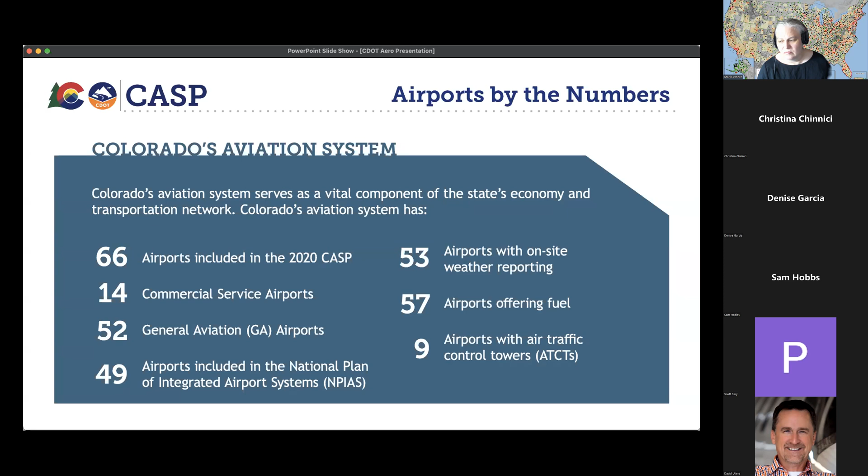And it's because of an airplane. So I think this is where our board is excited to try to leverage our existing system to find a way that these new alternatively powered aircraft that are more economically feasible, more environmentally feasible, that are scaled size-wise more to some of the market communities that we have, and how we can use this existing network of infrastructure in these airports without building expensive new runways and taxiways.

How can we leverage those to improve the way Coloradans move in our state? So this is where it leads into some of the things I know Scott was going to talk about, powering the future of aviation. And there's a lot of cool things on the horizon.

One that's being developed right here in Colorado is the new two-seat Bye Aerospace E-Flyer. It's a two-seat single-engine general aviation training aircraft that I think is really going to fundamentally change the cost and the ease of flight training. And it's no secret, if you've been following the news, there's a big pilot shortage. It takes a lot of hours and experience to become a pilot. It takes a lot of expense.

We're excited because here in Colorado, we have a lot of big flight schools, including the U.S. Air Force undergraduate pilot training program here in Colorado. How we can leverage these new electric airplanes to make flight training more cost-effective, quieter for the airports and their communities, and more cost-effective for the folks learning how to fly.

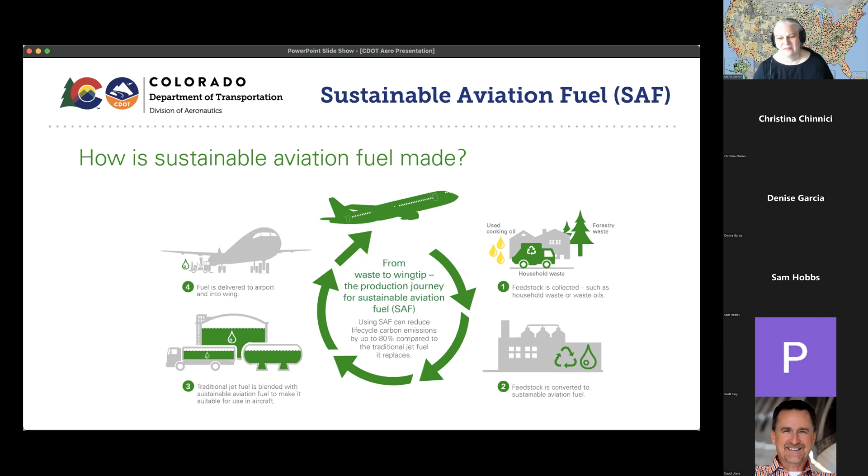I really appreciate it, and I will turn it back to you. Thanks, we really appreciate hearing about this. Let's see, one more question, and actually let's open it up to questions now since you have to leave early while we're getting Scott's presentation back. Can you say a little bit more about how you're working with airports already, David?

So we've really had some preliminary discussions, Marie, with I think some of the more forward-thinking airports in the state about potentially engaging in our study. But I think the first part of the study that we're going to undertake with NREL is going to be sort of an analysis of where people are traveling within Colorado, where are they coming from, where are they going to, what modes are they using, and then based on that data, we'll identify some regions and some key airports in those regions that we start discussions with.

I've talked with David Fleckenstein. Look, every single one of our state DOT directors, we would love to electrify every one of our public use airports and have them ready to go. But unfortunately, that just is not fiscally or technically feasible. So we've got to sort of narrow it down and prioritize those from a state level. And that's what our study with NREL will help us do, is to sort of focus on the key airports we need to start having those discussions with.

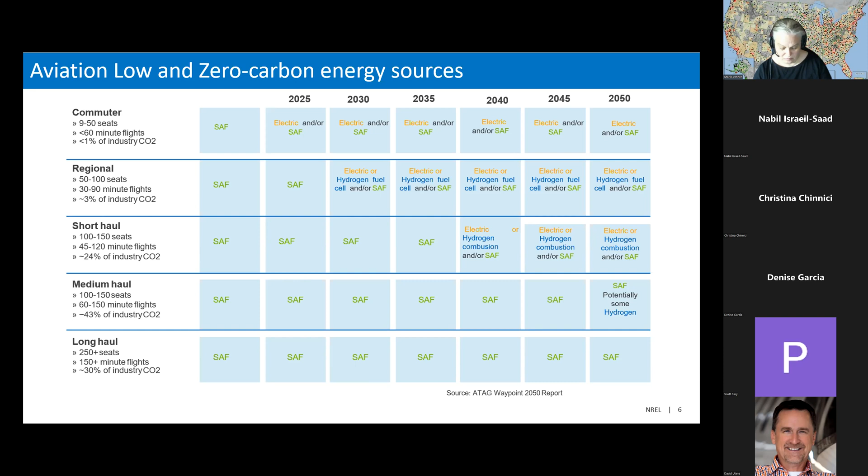But when you get to medium and long haul, liquid fuel, whether that is a biofuel, petroleum, or a new generation, they're called power-to-liquids, which is you take hydrogen and some type of source of carbon and make a liquid fuel that looks like kerosene effectively. That will be around for a fairly long time, it appears, in medium to long haul. So there's not one solution, is what I think the key takeaway here is.

Big thing we look at is each of these different next generation energy sources, whether it's sustainable aviation fuel, SAF, e-fuels, which are called the power to liquid fuels, or hydrogen or electricity. They each have a supply chain that has to get from where it's sourced to that aircraft to be used for transportation. And each are unique. Each have challenges and each have benefits.

And as you move through that process, we'll get to electric here in just a minute, but each of them are going to have their own discussions. Example, if you want to do SAF right now, SAF has to be trucked into many of the markets and then blended. Hydrogen right now is trucked because the pipelines only exist in a few regions, as an example. Electricity, the discussion is, okay, can we ramp the power requirements, the locations people want it at the peaks that they would like.

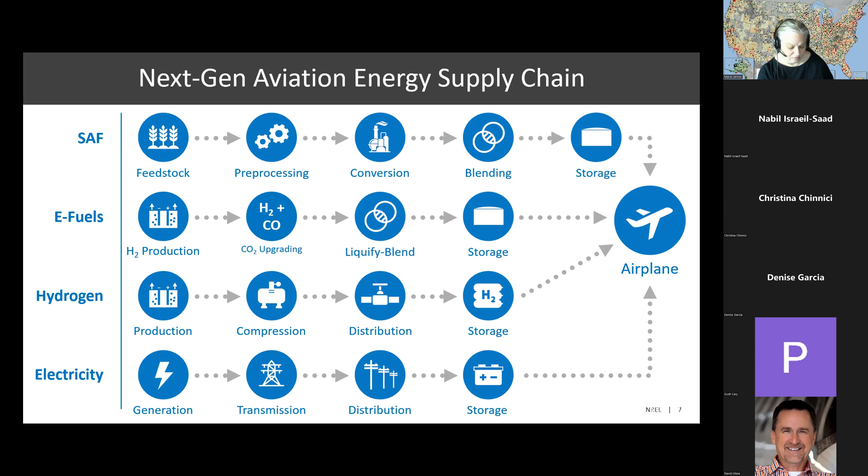Sustainable aviation fuel is the current viable solution to help reduce carbon emissions. So the DOT, DOE, USDA, FAA have all gotten together and are moving forward on what's called the SAF Grand Challenge, trying to have 35 billion gallons of sustainable aviation fuel available by 2050. The technologies already exist. There's already 7 pathways that are approved by ASTM. There's actually 9 if you count another certification process. And they are moving forward. Some of the challenges are just scaling and cost. And so those are weighing in on some of these discussions with SAF.

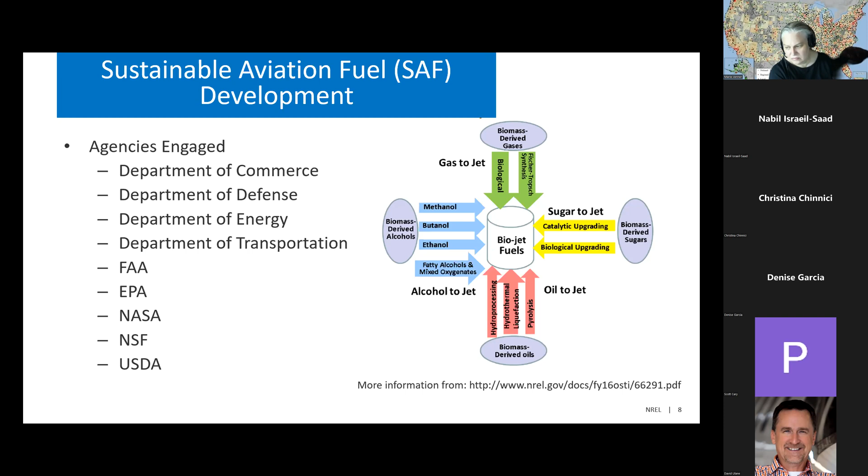Now let's talk about hydrogen. Hydrogen right now, there's also a strong movement here is that hydrogen sourced from clean sources, effectively wind and solar, and potentially depending on if you get into the color scales, you can call it nuclear, does not have air emissions, can be used, can provide long-term storage. And the other component here is that for sustainable aviation fuel, hydrogen is a key component that can actually make those products more viable more quickly. So you take a feedstock and then you actually add hydrogen to make it look like kerosene.

Within the hydrogen space, there's the Hydrogen Hub program, a little over $8 billion being put out to match and work with industry to start building infrastructure in regional nodes around the nation. This is moving forward right now to build these nodes.

The Department of Energy has started to scale this program to see if it's viable on an industry basis using forklifts. I heard an anecdote in the last couple weeks that roughly one-third of the food in the United States is moved by a hydrogen forklift, as an example, in warehouses.

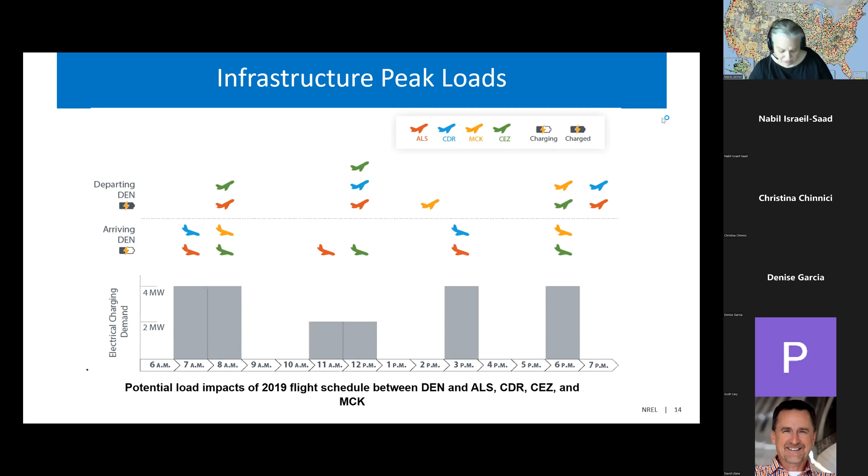DIA is—wow. So the outcomes we saw from that were: one, there is a market, and two, there's work that needs to be done on charging, just like there is on Class 8 trucks.

The labs have been spending a lot of time on the Class 8 trucking industry, supporting the megawatt charging standards that should be approved fairly soon, with CHARIN testing up to 3.75 megawatts of charging. That means the electrical infrastructure either has to have a way to store that energy close to where you're going to request it, which we expect will be part of the solution.

But you also have to make sure the infrastructure up to that location is in place, or come up with some way to travel with big batteries. The discussion of a fuel bowser—basically having 2 charges for an aircraft on a tractor trailer—has come up a few times, but you're doubling your infrastructure cost by doing that because that still has to charge somewhere.

There currently is not a standard within aviation for the chargers. eVTOL is moving towards existing automotive standards, 350 kW and megawatt standards. Regional air mobility, which is what we're talking about, the fixed wing, 9-seat size and larger, is going to the megawatt level and higher.

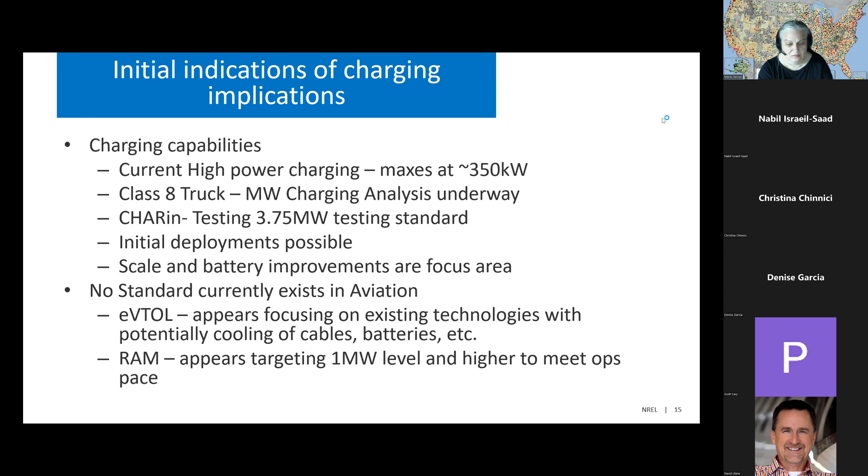Next slide. Oh, that's me. Sorry, I was losing my mind today.

So how does this matter at the airports on the ground? Well, each airport is affected. We look at it as essentially a small city, and not every airport has all these components. But you think about a hotel, it's housing. When you think about large loads, you're going to have potentially buses, cars, liquid fuels. You have sometimes service, and then you have 24-hour-a-day facilities that need to move goods and passengers.

In many cases, even the smallest airports all across the nation are being used for medevac and other critical needs in these communities. And so thinking about it from that perspective, having a stable energy source for your transportation needs is extremely important.

If you start to transition away from those tanks of fuel that are available on that airport, that provides a buffer if there's a disruption in power. You need to start to plan to say, okay, we need to be able to think about this as a system and make sure that we can keep that same level of consistency.

The first thing we always say is start by reducing your loads. Do everything you can to lower the loads on your airport. It leaves more room in your existing transmission systems coming in, but most likely you're going to have to start to think about this from an overall energy plan at these locations and then move from there.

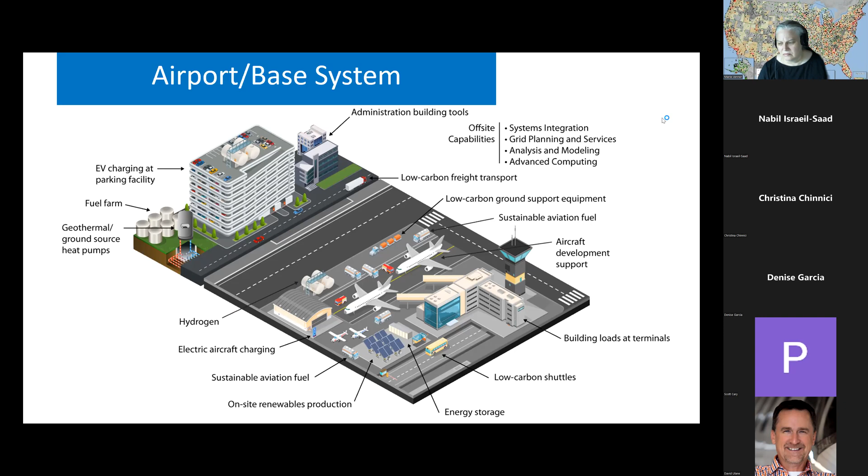So who's working on this? A lot of people are. The FAA is working from SAF to electrification to hydrogen. We're helping them with some of their background work at the Hughes Technical Center. Department of Defense is working through a program called Agility Prime, trying to help some of the manufacturers that are flying or near flying get technology viable or get viable for certification. AFRL is working on SAF and some other things.

DOE, NASA, DOT, the DOTs that we're talking to, and I'm sure more of you on the phone are all working on this. So there are resources available. The national labs are here to help everyone. And so if there's research that's already been completed, we are more than willing to try and steer you towards that research. Everything that the lab system is doing is intended to be available for everyone to use across the nation.

This is just a sampling of resources that are available, and there are more that continue to evolve. And that's what we have for today.

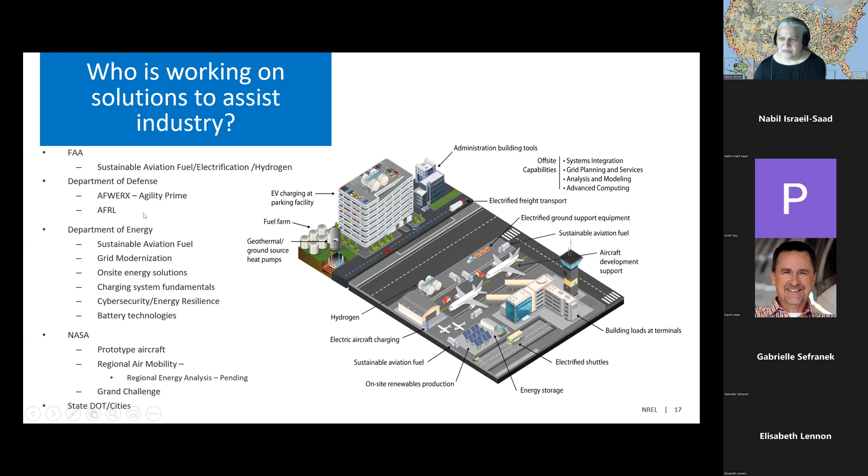Going on with what you were talking about, Scott, I wonder if you might turn back to that table with some of the costs. Do you have maps of all those substations so you're able to have those dialogues, and also how do these costs compare?

Part of this is to get the awareness up, both for the operators and for the utilities, to say, if you're going to be a part of this, which you most likely will have to be, how do we build this into your system? The certification process for aircraft is 3 to 7 years, while to get a substation upgrade could be 2 to 5 years or more, especially if the utility isn't clear on what is being requested.

So you put those together, and we saw a gap starting to build where aircraft were in certification, but the infrastructure wasn't starting. But that seems to be being heard by the aircraft manufacturers at this point, with some trying to get the initial use case of smaller chargers out to some of these airports to support their needs and potentially others. So the 350 kW size is what at least one manufacturer is trying to get installed.

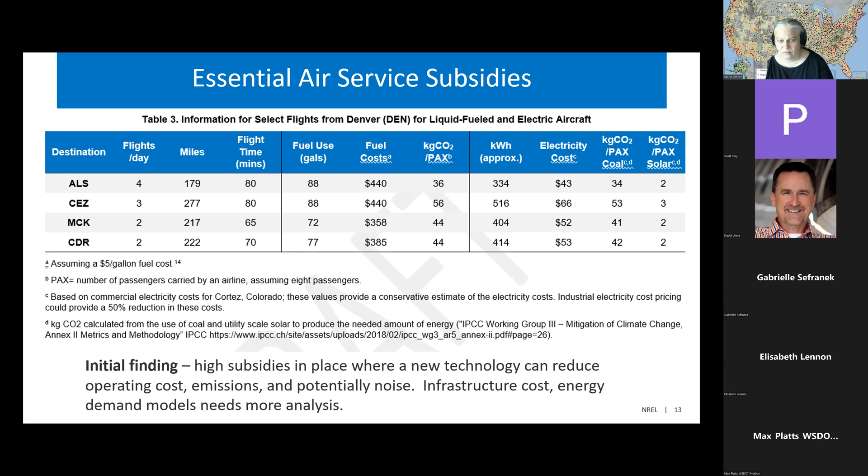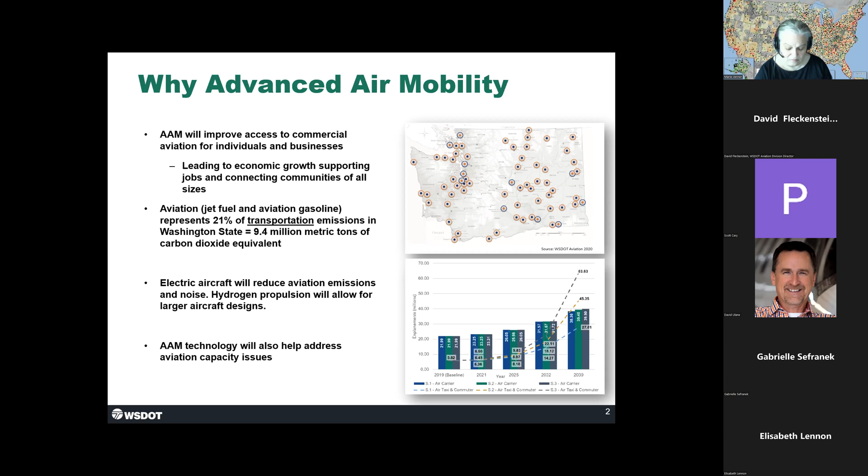As we look at adding capacity within the state of Washington, two of the biggest things on people's minds are emissions and noise. With advanced air mobility, you have the opportunity to address some of people's greatest concerns about aviation in general.

So the next thing we'd like to talk about is where have we been and where do we think we're going. We really started this effort in Washington as early as 2017, brought to us by a legislator who was thinking about electric aircraft early on. She essentially said, can we set goals for the state of Washington for electric aircraft? So we got together with key players—manufacturers, utility companies, maintainers, some of the airlines, FAA—and did some early work on what we could do and what the opportunities were for Washington State.

From that, we released a report in 2019 that facilitated a feasibility study for electric aircraft in 2020. While putting that feasibility study together, you really started hearing more about eVTOL aircraft and the idea of vertiports that would service urban communities. So from our early focus on regional air mobility, we've now included urban air mobility into the aviation system and planning work going forward.

From that, we looked at needing to develop a strategy—what's our strategy going forward—and I'll talk about that in a minute, here in 2021. And just recently, we're in the middle of our Washington State Aviation System Plan update.

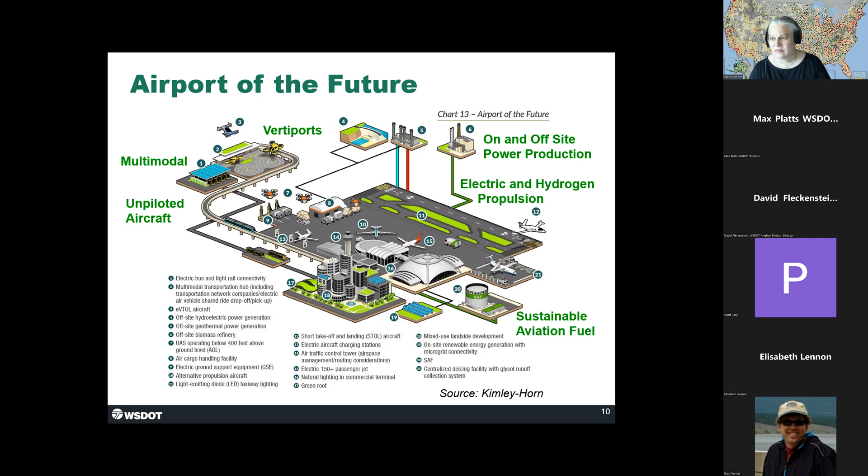We're really thankful that we have a lot of good partners with the airports and the OEMs based in our state, so we can really start seeing this stuff shaping right in front of our eyes. So with that, I'll turn it back over to Marie and open up for any questions.

You're muted, Marie. Can anybody else hear Marie? No, I'm not getting her either, David.